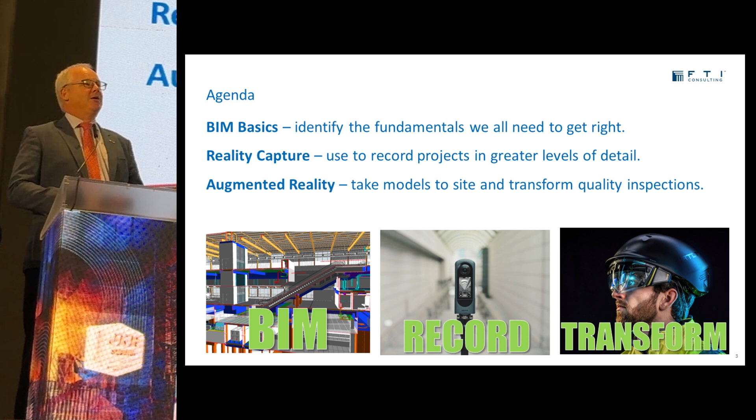And I'm going to leave you with some glimpses into the future of technology in construction. It's not happening on every project, it's only happening on a few, but it's very, very exciting, and it's worth knowing what's coming down the road. Maybe we'll see them on some projects in Kuching, maybe on other projects in Sarawak, but these technologies are coming, and I'm going to give you a glimpse of some of them. So those are the three topics we're going to go through today.

So my presentation today is going to follow a timeline. And as I was introduced, you heard some of those snippets. I'm going to tell you about my journey from when I graduated a long, long time ago in a land far, far away in 96, all the way up to present day. So I started my career working as an engineer, working for a company called Arup, who some of you may know. And I was working on projects in Ireland in the late 90s, doing 3D modelling of steel structures back in 98, 99. So I've been doing 3D for a long time.

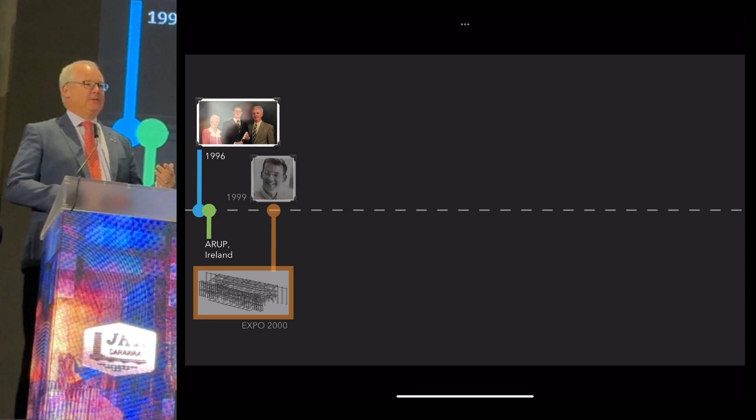In 2000, I moved to Hong Kong. It was my first experience of living in Asia. And in 2003, I started my first company. I really liked Hong Kong, but I wanted to try creating a new company. And that company was focused on using 3D technology to improve construction projects, try and reduce risk, reduce costs, and improve schedule keeping. The mission has not changed in 20 years. I want you to start thinking about how to use 3D modeling to save costs, save time, and reduce risk.

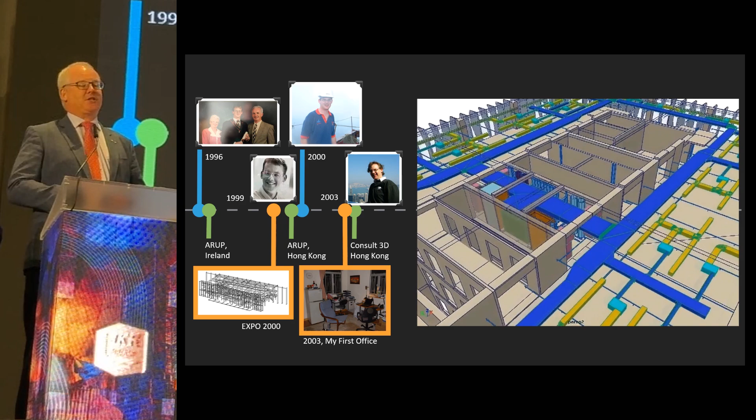This was my first BIM project in Hong Kong. This was an office building, and we were modeling ductwork and pipework. And this was a very simple 3D model. So for those of you who are thinking, well, BIM is new, I have bad news. This technology is 20 years old already, and I've got the grey hair to prove it.

So between 2003 and 2007, as the company was growing, we started working on a number of different projects, but all of our projects were taking 2D drawings from somebody else, making a model, and then finding a problem in those models. And over that period of time, that 4 or 5 years, it was very obvious that it was a valuable process, but it was not effective.

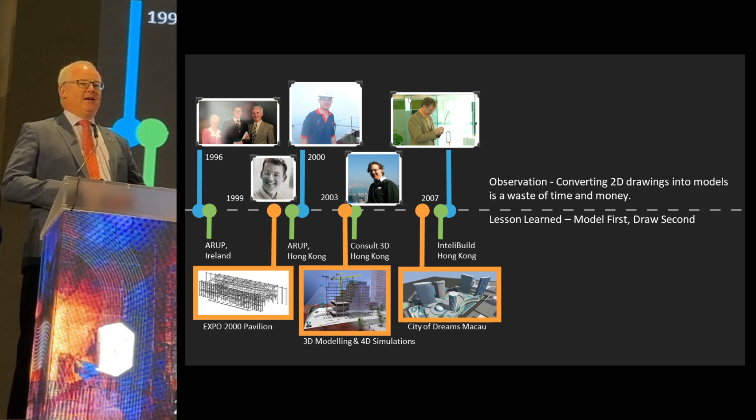Because we would find a problem, and then a month later we would go back to the architect, and they said, oh no, we fixed that problem already. So you would never actually change the design, you never improve the design. So the first real BIM project that I got involved with, actually before I get to the BIM project,

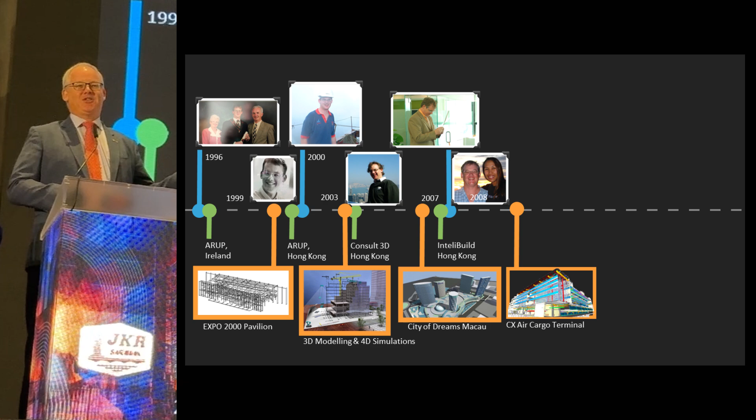the reason I live in Malaysia is I met my wife playing golf in Malaysia. My wife is from Ipoh. She's a squash player and now a pickleball player. But the reason I live in Malaysia is all down to my wife. And she dragged me back here a couple of years ago. So you can thank my wife for bringing me to Malaysia. Yes, a round of applause, of course.

So I'm going to speak about the first real BIM project which we did, back in 2007. This is an industrial facility in Hong Kong. It's the Cathay Pacific Cargo Terminal. This is a very, very large, very, very complicated industrial building. And the owner set out to solve a couple of problems. The owner's masalah was basically he wanted to reduce the risk of problems on the site.

He knew the building was complex. He knew that he could use models to solve some of the coordination issues. There was one very straightforward objective: use the models to produce the construction drawings. That was the objective, because that would then drive everything else.

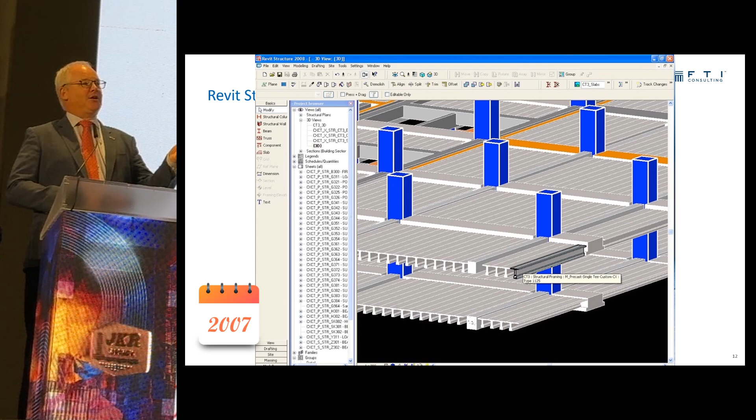So, I'll show you just what this looks like. 2007, this was Revit, a very early version of Revit. Revit is the most common tool for doing BIM. There's a structural model, and the structural model had a number of elements or properties to it, so we could determine the different types of objects, columns, beams, etc. We had an architectural model.

This was an industrial facility, so there wasn't much architecture, so my architectural friends here will be like, well, this is not an architectural project. And then we had all the building systems, the mechanical systems, the electrical systems, and then we had to do the coordination. This was a very complicated project, and it taught us some very valuable lessons.

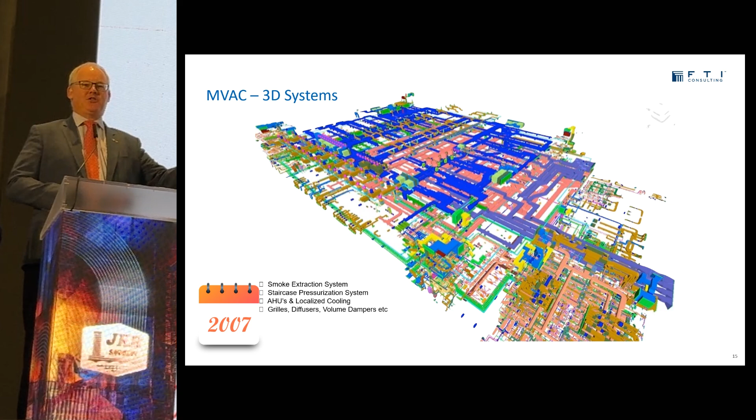The first one is you have to put a lot of information into the model. So building the model is not the actual end game. It's all the information inside of the model. So understanding what fans you have, what pumps you have, what cable trays you have, that's all information in the model. So you need to understand that building up the information is as valuable as building up the 3D modeling.

One of the problems with this project was coordination, and I'm going to come back to that in a second. But this is just one example of the level of piping in the building. And then we used that to produce the drawings. So these are drawings from 2007. And you can see the early stages of an understanding of how to use the technology differently.

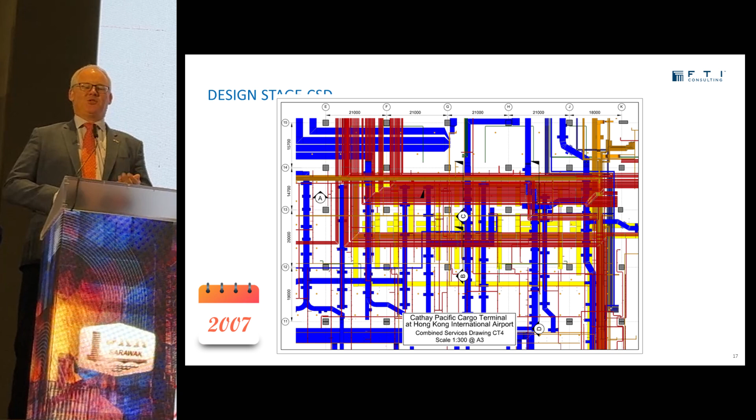If you look at a CAD drawing on a computer screen, it will have lots and lots of color. But then when they print out the drawing, it's all black and white. But it's 2024, we have such a thing as color printers. So why don't we have colored drawings? If we have colored drawings, they become easier to understand because you can see different systems and different layouts. So these were the drawings in 2007. The technology exists. It takes a configuration, it takes a process. But then you can use it to produce good quality documentation.

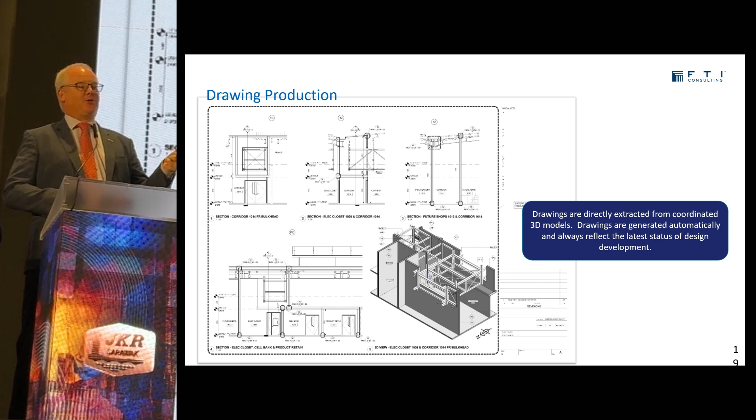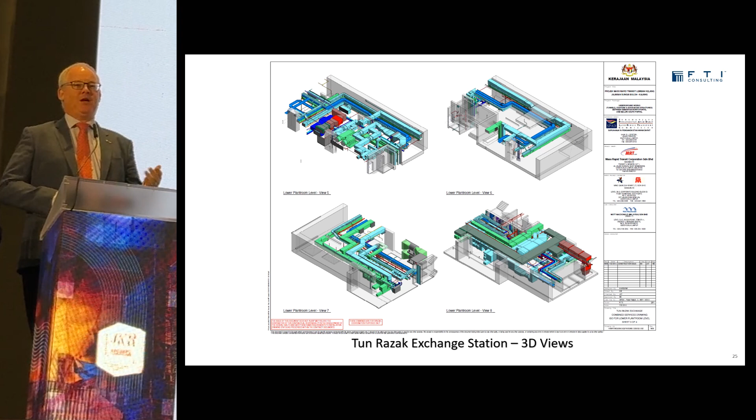But the best part of this is that because you've used a 3D process, you can produce multiple sections and you can produce 3D views. So if you're working in JKR and you're using these tools, if you want to be really successful and you want to get more people involved in the process, don't just produce a standard set of drawings. Add in these 3D views.

And you will start to see two things happening. First of all, people will realize, oh, hang on, somebody has built a 3D model of this project. So if you're the engineer working on the construction project, you will be able to go, hang on, I know there's a 3D model.

I've seen 3D pictures on the drawings. There must be a 3D model. And then what will happen is more people go, hey, how did you make those 3D models? I want to use those 3D models.

So please, please, please, if you're working in the design, whether on the architectural design, the engineering design, and you are using any kind of 3D modeling, it doesn't matter what the 3D modeling is, make some isometric views and put them in the standard drawing sets. Don't just produce 2D drawings and assume that people know you're doing BIM. Make sure you put these 3D views in the drawings.

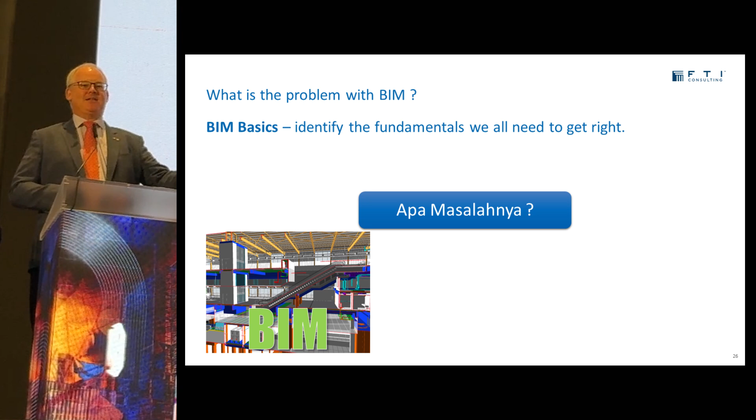That's the contractor's job. So the first problem that you come up with as an owner is when you start demanding BIM, the design team will start going, no, that's the contractor's problem. Okay? So just beware of this problem. And the reason is that when they start doing this coordination process, they call it clash detection. I call this chasing your tail. If the process is not correct, you keep chasing your tail. You go round and round and round in circles. So what does this look like and what causes this problem?

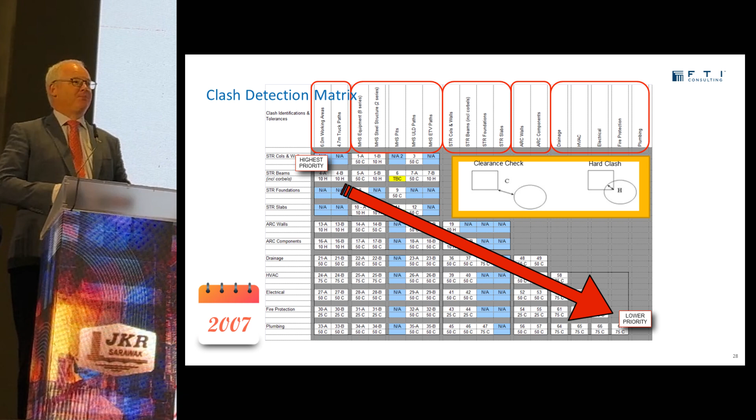On major projects, on complicated projects, our BIM teams will create what we call a clash matrix. We will create basically a set of checks that we want to do in the model. We will check the architecture, we will check the structure, we'll check the mechanical systems and so on and so forth. And we will check one against the other and we end up with this matrix. And every single system is checked against every other system. What that creates is hundreds and hundreds of tests. And each of those tests create hundreds and hundreds of clashes or coordination issues. So you end up with these long lists of problems.

So one example, just to show you one simple snapshot. In this example, the ductwork is clashing with the concrete. Okay? Now this is why the industry does not like BIM, because it is very easy to find all these problems. It is very difficult to sort out which one's most important, which one has to get fixed first, and when do I have to get it fixed by?

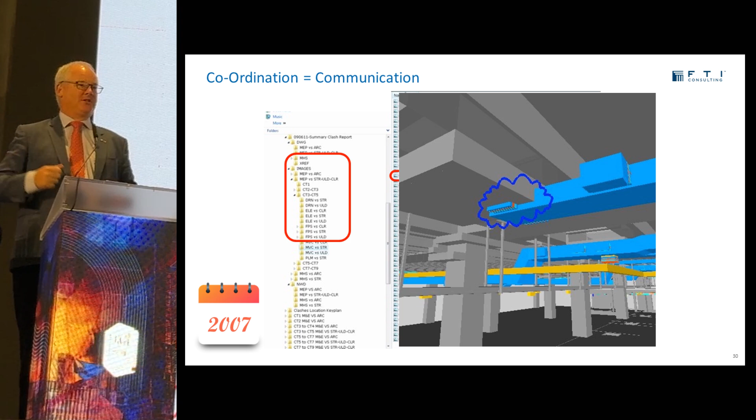So, if you're just new to BIM, it sounds great. But once you've done one project, you realize this process of finding the issues and finding the coordination problems is easy. If you give me a model and you give me 1 hour, I will give you 10 problems back. If you give me a week, I'll give you 1,000 problems. It doesn't mean the design is bad. It doesn't mean that the engineering is poor. It just means that there's more work to be done before we can construct these buildings. So how do we solve this problem? What's the solution?

We recommend that you put in place a coordination process that's set to a timetable. We say every 2 weeks is a guideline. This process is cyclical. It goes around, it's iterative. So every 2 weeks we repeat the process. We put the models together, we identify all the coordination issues, we run a coordination meeting, we prioritize the problems, and we assign those problems to somebody to fix. Design Management 101.

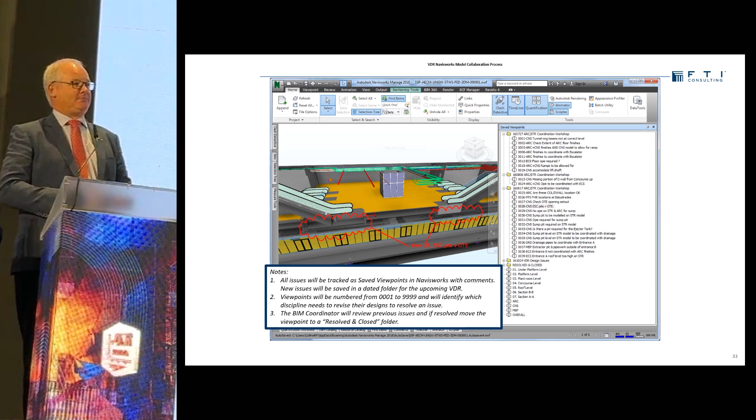But we agree on a timetable to fix the issues. So we find the problem, we find someone who's going to fix it, and we give them a deadline. And then we create a process to manage that. So if you're using Navisworks, you can create a whole set of saved viewpoints in Navisworks. And if you've got things set up correctly, it can be very, very efficient.

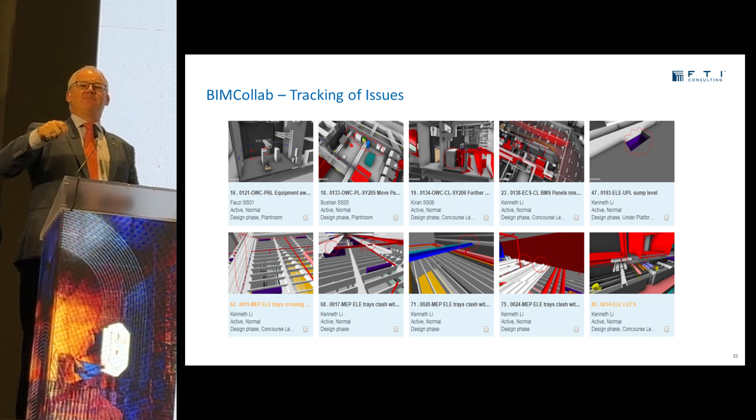If you're using a more cloud-based system, you can use a system like BIMCollab. And the way the system operates, every issue is tagged, every person responsible is tagged, and a deadline is set up. And then you can manage that process. So as JKR, if you're project managing a design, if you're project managing the shop drawing process, if you're managing any kind of deliverable, you need to set up this BIM management process. Identify the issues, identify who's responsible, and then give them a timetable. And then manage that process.

So, how do I play my role in this? With 20 years of experience, I'll be quite honest, I don't like getting involved in projects and doing clash detection and going to meetings. I much prefer to be the advisor and give people advice. So the way I play this is that through my new business at FTI, I come at this in 3 ways.

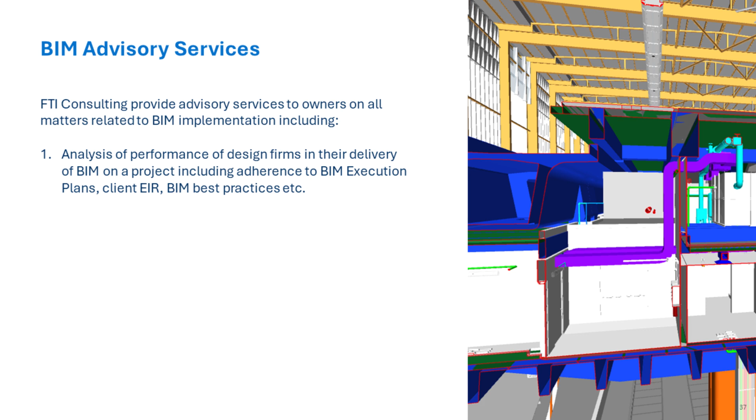So the first thing I do is I will look at how the design teams are performing against the requirements from the client. So if JKR have set out a set of requirements for a bridge project, a hospital project, a school project, I can look at what the design team are doing, and I can tell them, okay, you need to improve this, you need to improve that, you need this training, you need that training, and give the design team the support and training they require to make them successful in the project. They have to be able to meet your requirements, because when we get to the next phase of going for construction procurement, we need to know that we've got good quality models, good quality design, otherwise it's been a waste of time and a waste of money.

And then the third step is actually working with the contractors to make sure that their supply chain, the mechanical contractors, the steel contractors, can also participate in this process. And giving them the training and the briefing and the support to make sure they're successful.

So the way I describe this, I'm a bit like a coach to a basketball team or a coach to a football team. They play the game, they work out the players, I stand on the sidelines and give them a playbook, give them the moves for the attack, give them the moves for the defense. But I coach the teams through this BIM process. And I use my experience of doing it wrong in previous projects to make sure they don't repeat the same mistakes.

So if you're setting up a project and you're new to BIM, these next 6 or 7 slides are probably a good starting point for a client who wants to understand the risks in their project with the designers. So as you set up a new project, what are the problems? Apa masalahnya? What are the problems I have to work out? So we're going to go through it discipline by discipline. This is like a cheat sheet. So the next project you're doing, you have a starting point.

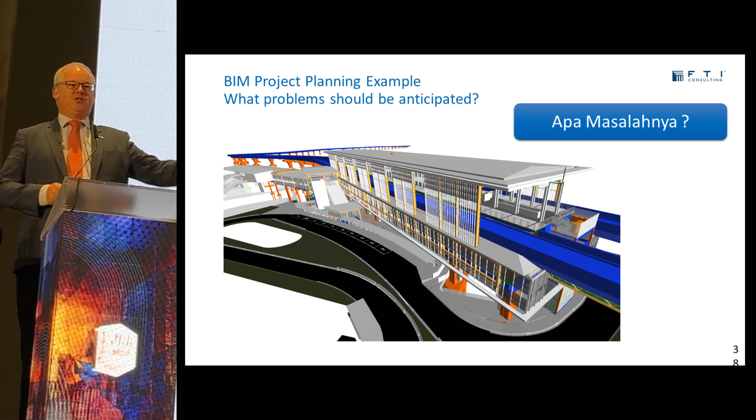So the first one are our friends, the architects. Most architects in Malaysia are now using Revit. They might claim that they're not, and they might claim it's more money and everything else, but most of them have the ability to produce 3D models. This is down to a number of factors. It is down to factors like JKR, Sunway, Gamuda, and other developers like YTL demanding that the architects work in these processes. It's also down to JKR.

JKR have a general policy that all their projects must be done in BIM. So you can assume that the architects are working in BIM. What you need to make sure is they have the capacity and the skills to deliver the project. So usually, the architect is a safe bet. You don't really have to worry about the architect too much.

The structural engineers, I started my career in 1996. We were doing 3D analysis back then. Most of the engineering firms are working in 3D already. They're doing 3D structural analysis, 3D structural detailing. What they're not used to doing is sharing those models with the architect. So what you have to do is you have to make sure that the architect and the structural engineer are sharing the information and they're checking each other's work.

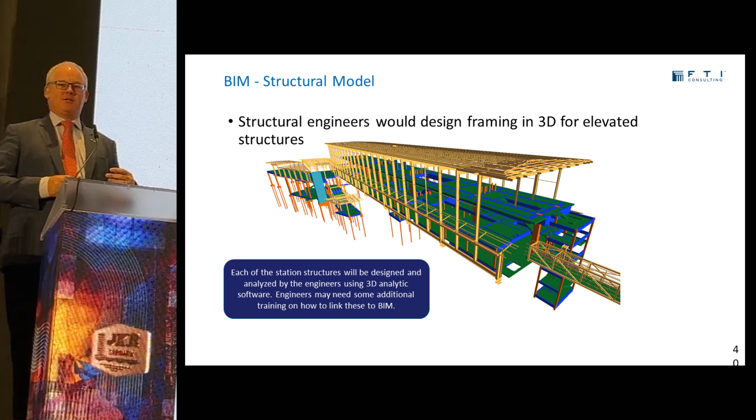So the columns are in the right position, the openings in the right position, the levels are correct. But that interchange should happen automatically. In some cases, the engineers may need a bit of training, but generally speaking, it's something that comes naturally to a structural engineer. And I come from a structural background. Same with the civil engineers.

There's probably less experience in the civil engineering groups. So people that design highways, people that design bridges, those that are doing hydro projects, they have not been exposed in the same way. But if you're doing an infrastructure project, an MRT project, the hydrogen bus project, they can be trained up quite quickly. It comes again naturally. So you need to watch out and see what they are up to.

I met a mechanical engineer earlier, and this is where I have to be very careful what I say next. The mechanical, electrical, and plumbing engineers struggle in the world of BIM, in the design phase. And the reason that they struggle is they're not used to doing fully detailed designs. They're used to doing schematic layouts, they're used to doing kind of level 2 design where they work out all the major routing, but they don't worry about all the interference, all the coordination. Typically, that's left for the contractor. So a lot of the coordination is left up to the contractors to solve.

That is a major problem when it comes to BIM, because we want to actually produce a coordinated design as early as possible. So this is where, as a project manager, you need to spend a bit more time and a bit more effort to make sure that the mechanical engineers, the electrical engineers, and the piping engineers are actually participating. Because if they're not, all the problems that are baked into design will become problems in the construction project. So this is the area that I urge you to pay attention to. Making sure that the engineers on the building services, mechanical design, are actually supported, they have the training they need, and they're given the time to do the work.

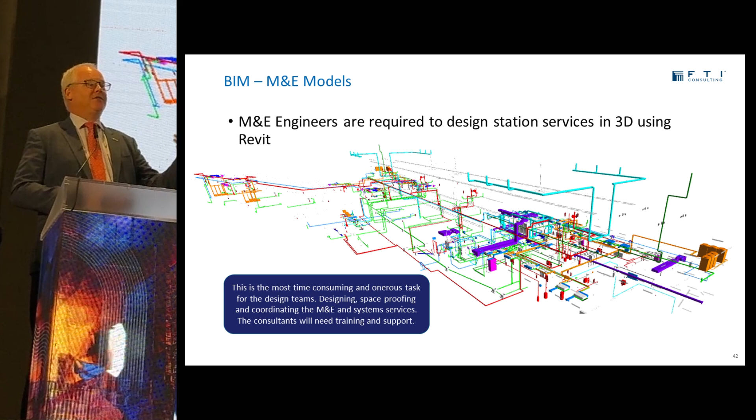And then once you've put all of those teams together, the biggest challenge, like I've already mentioned, is the clash detection and the coordination. Most design firms operate in silos. Mechanical engineers will take the architect's 2D drawing and then draw on top of it. They don't want to worry about openings, they don't want to worry about beams, they don't want to worry about risers. So that coordination is very, very important. So managing the coordination between the structure, the building services and the architecture, that is the biggest challenge in running a BIM project.

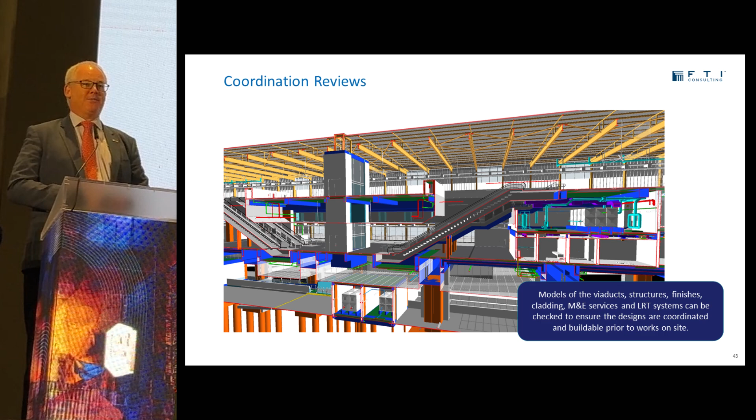So what's the trick? How do I set myself up for success? How many people here have heard of a BIM execution plan, or a BEP? Anybody here heard the term BIM execution plan? Now you have. Oh, we've got our friends from the big project. This is the most important document that JKR must have in your contract documents. If you want to be successful, JKR have to specify and contractually obligate the contractors and designers to work in BIM, and they must specify this set of documents.

The BIM execution plan. Who is going to do the work? What are the roles and responsibilities of the architect, the engineer, the designers, and the BIM staff? How are you going to collaborate? How are you going to do the coordination? What software are you going to use on your project? And that needs to be specified, because the more specification that you make at the beginning of this process, the more likelihood of success. Then you need to define what we're going to use BIM for, which problems are we going to solve, and then you can set out your standards and guidelines. The good news, all these documents exist, and JKR have a full suite of BIM execution plan documents that you can use. What I encourage you to do is put them into the contracts and make them mandatory.

So that's the kind of BIM background. And everything else I'm going to show you this morning is based on that being correct. That you have got structural models, you have got engineering models. So I call that getting it right. I call it the BIM basics, so that you can do coordination, you can do planning, and you can do the sequencing. If you're really good, you can do quantity takeoff, and you can do information management.

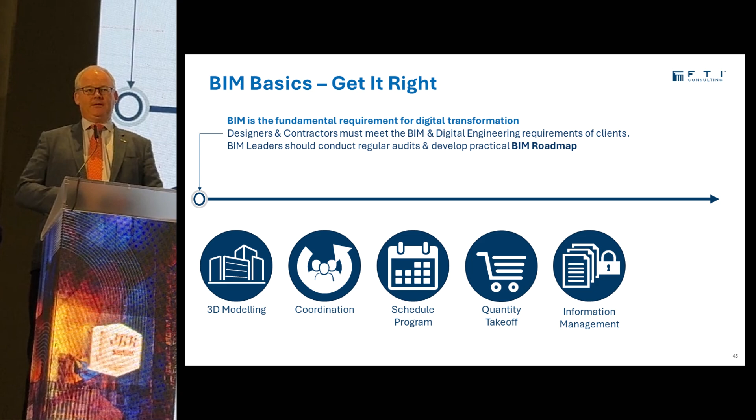So one of the things that's in the middle of the slide, I'm going to quickly show you, is scheduling and programming. How many projects have you seen where someone's done a 4D sequence or a construction simulation sequence? Has anybody seen a construction simulation sequence?

A few people? Okay. So I'm going to share with you an example of a 4D BIM sequence, but more importantly, I'm going to tell you how to use it from a project management perspective. Most of these things are used for marketing and PR, but I want to show you how to use it for actually managing a project.

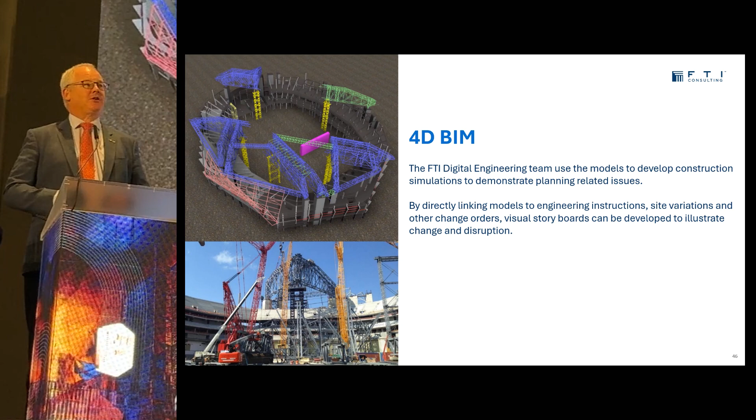So I'm going to share with you an example from a project that we did about 10 years ago. This is a stadium in North America. This is in Atlanta, Georgia. It's called the Mercedes-Benz Stadium. I'm going to show you how we planned the work. I'm going to show you what happened on the project. And I'm going to show you how we use 4D BIM to actually monitor the work.

So 4D BIM is basically linking a computer model to a schedule or a program. So what you're doing is you're taking all the activities that are planned for the works and you're linking those to the actual models. So you can actually simulate the construction of a project. This works for buildings, this works for bridges, this works for underground structures. Any type of project can be sequenced.

There are a number of use cases for this technology. So the first one is actually understanding a project and understanding a construction methodology. So if you're an engineer, can I build a viaduct in this sequence? And will it be viable? And once you've created a sequence, you can use that to communicate with your senior, you can use that to communicate with the contractors, and you can start to get feedback about your understanding of the project.

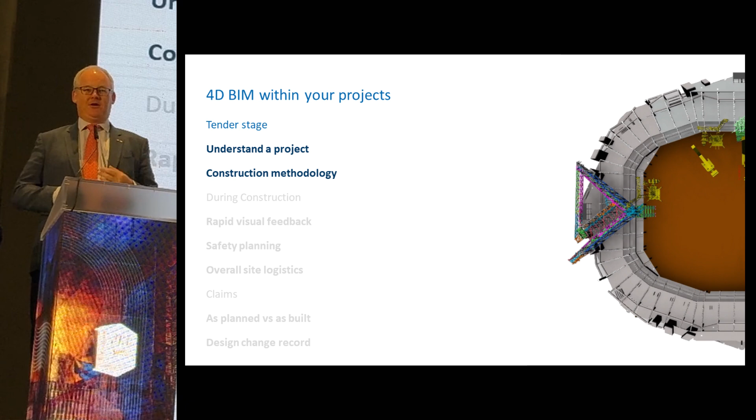When the project starts, you can use this for planning. You can use it for safety planning, logistics planning. More importantly, you can also use it for maintaining a progress record. So if you keep this up to date through the process, you can maintain your progress updates.

And we've all been involved in projects that have ended up in disputes around time, disputes around costs. Sometimes these models can be used to demonstrate what was planned and what happened. That can be used by the owner, it can be used by the contractor, and it can also be used to demonstrate design change. What changed throughout the life of a project?

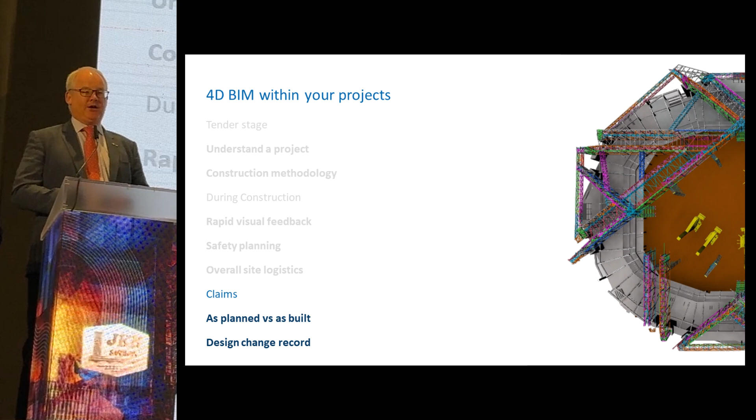So using this example of a stadium in North America, I know it's a very complicated project, but it's a good example. What is the problem? Pretend that you're the contractor and your job is to erect the steelwork for the stadium roof. And this is one of the largest stadiums in the world. How do you plan the delivery of the steelwork, the positioning of the cranes, and the erection of the steelwork to be an effective process?

Traditionally, they would use 2D drawings, they would have cardboard cutouts of the cranes, and they would play with all these cardboard cutouts for hours and hours and days and days. What we did is we created a virtual simulation. So we took the stadium model, and each block that's in the ground is the preparation of the steelwork. So they have to first of all assemble the steelwork on the ground, and then they use the cranes to erect the steelwork. So the blue is the erected steelwork in the sky.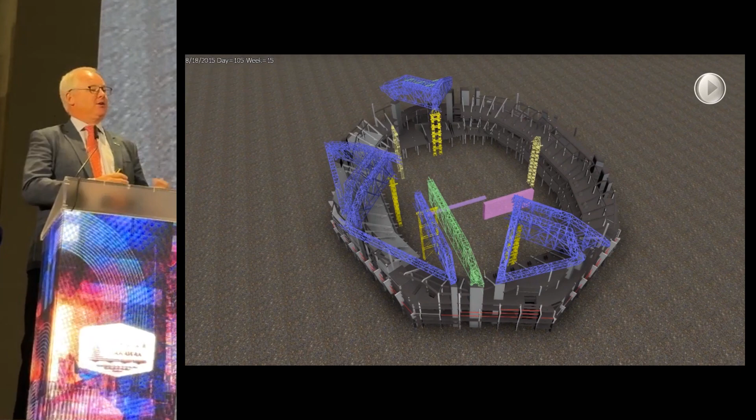So we went through 6 weeks or 8 weeks of this process, working with the planners, working with the crane operators, working with the delivery teams to make sure that we could get every single piece of steel into the stadium, we could erect all the steelwork, and that we would actually be able to do this successfully. So this is planning using a 4D sequence. So we've taken the structural steel model, the BIM model, and we've linked it to the construction schedule. And you can see we've planned out every single step of the works. So you can see how it's all going to go.

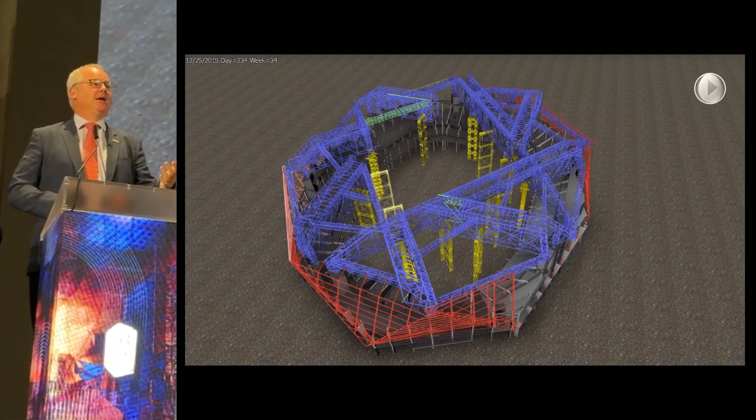The good thing with this presentation is that once you've seen the sequence, you understand how that's going to get built. And then you can share that with the steel fabricator, you can share that with the site workers, you can share that with the safety officer, you can share that with the public if you want. And you can get them to all understand, okay, this is what's going to happen. So that's what it looked like before construction.

The great thing with this project is they set up a CCTV, and EarthCam recorded this project. This is what it looked like in reality. This is a time lapse.

And again, I recommend this for all your projects. If you have the ability to put up a CCTV, it's a great way of recording a project. So you can see all the cranes are inside the stadium. There was no space around the stadium. All the cranes were inside the stadium.

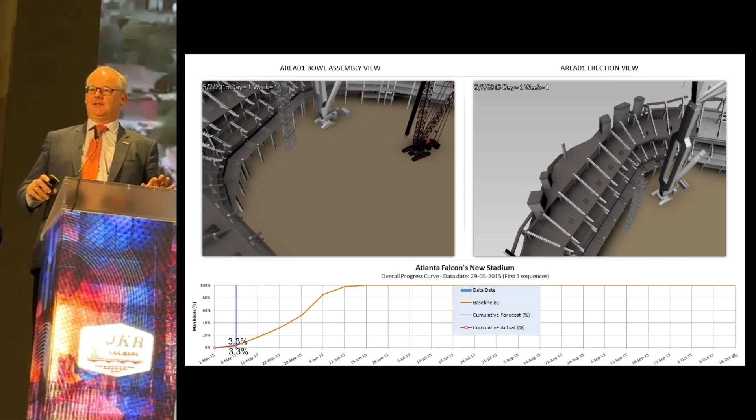And then you will see the steelwork was erected pretty much the same way we planned. So we had a plan, and then we had the actual. And you can do a comparison between the two. And this is where 4D is very, very valuable. So most people will use the 4D to make the animation, and then they'll stop. But then you're losing out a lot of value. If you maintain this process through the construction project, you can actually monitor your progress against the planned.

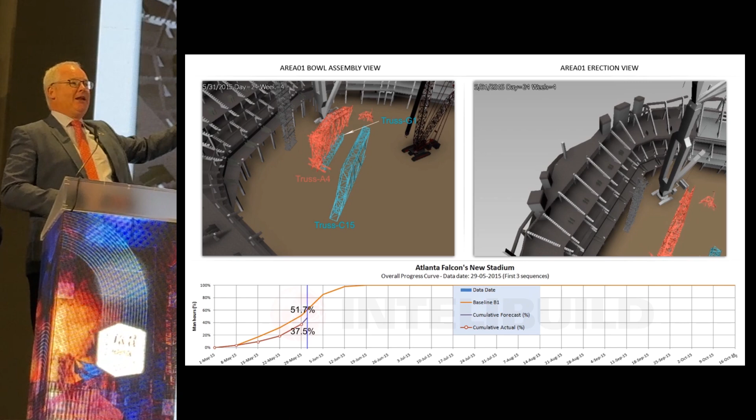So here you can see on the bottom curve, the orange line was what was planned in terms of productivity. And then the red line is the actual data coming from the project every week. So we plotted out using the sequence, and in the top, you can see the actual sequence that was being monitored. So on the top left panel is the erection of the steelwork on the ground, or the preparation, and in the top right panel is the actual erection sequence.

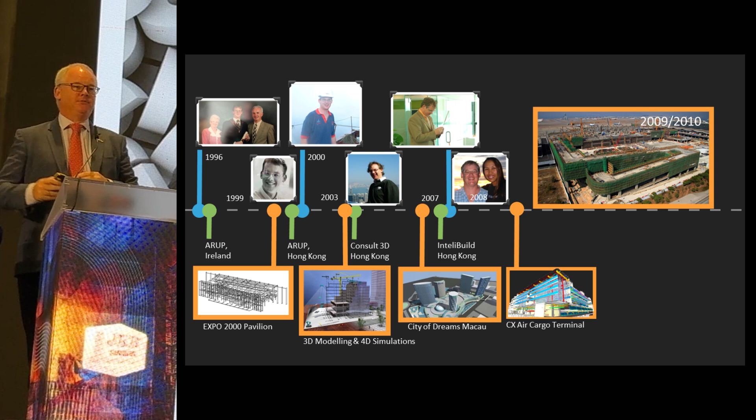So if you're doing this kind of sophisticated project, like a bridge project or a very complicated hospital project, this is a very good way of monitoring how we planned out the works and then what's actually happening on the site. And by doing it this way, you create a very good record of the actual project. So this is a very powerful way of recording a project as it goes forward. So the learning here is, don't just use 4D for marketing, use it for project planning. Now I'm going to transition into and speak about reality capture.

So going back to our Cathay Pacific cargo project as a reference, when we were doing the construction of this project, there was a large number of problems. Let's be honest. BIM was not a big success. BIM was useful, but a lot of things happened that shouldn't have happened. One of the problems was that the mechanical systems, they were highly coordinated in the models, but they were not installed in the same way.

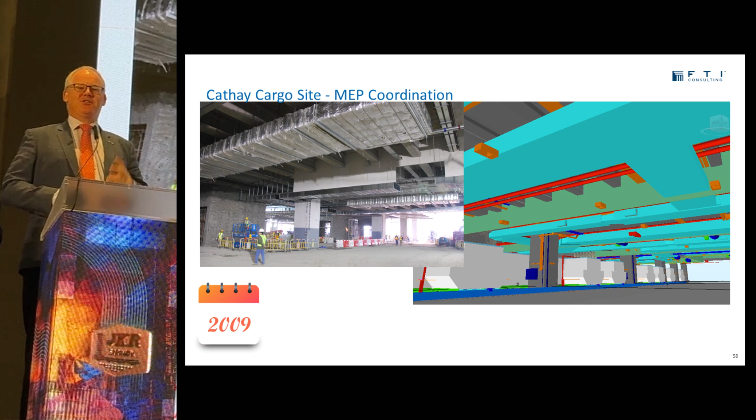So what you will find on projects, again, this is a problem with BIM, the BIM team will create a ductwork layout or a pipework layout, and then the guys on site will go, nah, we're going to do it differently. And then they put the pipe somewhere else. And then you have a problem. Then you have a site that's different from your engineering coordination model. And then you're in real trouble.

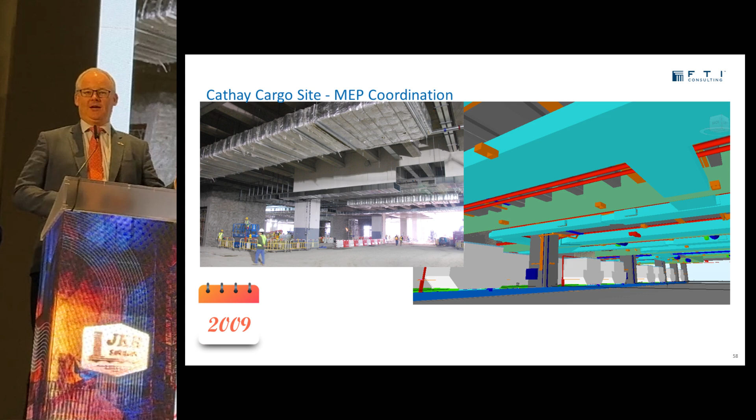So in order for us to monitor what was happening on the site, we would walk around the project with a digital camera, take a photograph, and then we would go back to the office. We would try and find a similar location in the models, and we would do a visual comparison. So in 2009, 2010, the best technology we had was to take basically holiday photographs and compare them to the models. And if something was different, we would send an email to the construction manager going, at this grid line, this cable tray is in the wrong location on site. And then we had to make a decision. Do we have to take it down and fix it, or can we work around it?

Okay, but we had no way to link what was happening on the site to what was happening in the model. So the challenge in 2009 was, there was a model that was on a computer, and then there was what was happening in the real world. And there was no way to bridge that gap. They lived in two very different worlds. So the problem is, how do I compare what's happening on the project to what's in BIM? And it was very, very difficult 10, 15 years ago.

The good news is, now it's really easy. And it's also really affordable. So I want you to see what's happened in 10 years, and I guarantee you, at least 2 people are going to get on Lazada and order a 360 camera before this presentation is finished. Because this is really useful technology.

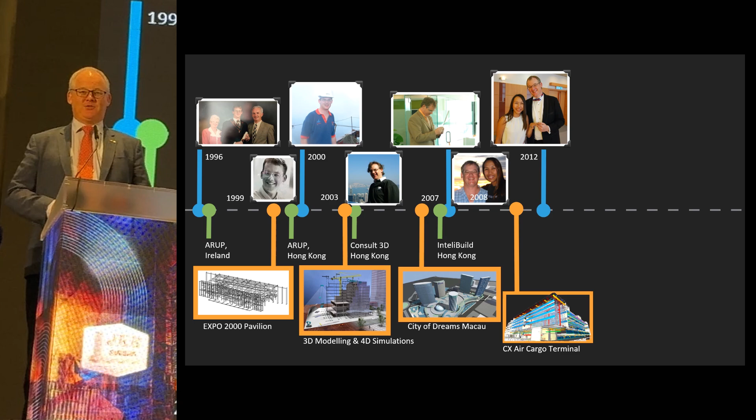So, before I tell you about that, my wife got me married in 2012. That was it, I was done.

In 2014, we moved on to the Midfield Concourse Terminal. And this is where we learned about a better way of linking BIM to the site. So I'm going to speak about 3 technologies this morning. The first is going to be laser scanning. The second will be 360 cameras, and these are the sequence, and then I'm going to talk about drones.

Laser scanning was the first technology available that could link the real world back to the BIM world. By scanning a construction project with laser scans, I can overlay that with a BIM and I can start doing a direct comparison. It was no longer a spot the difference visual check, it was a real 3D check.

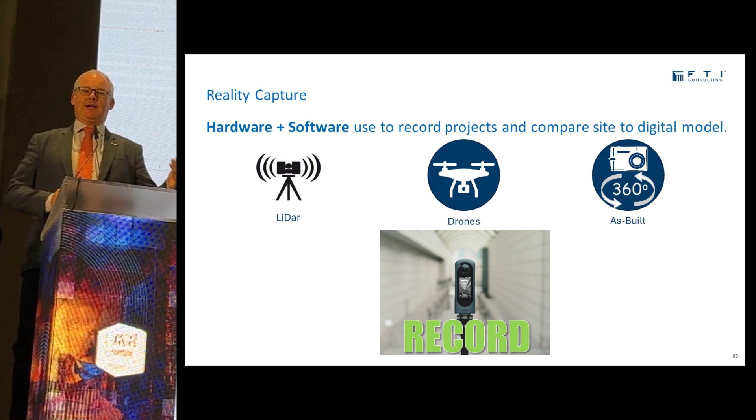360 cameras have become very popular in the last 3 to 4 years, mainly because the technology's got much, much better, but they're also much, much cheaper. So you will start to see many, many projects using 360 cameras. I can tell you now, all the major contractors in Malaysia are already doing this process. So Sunway Construction, Gamuda Engineering, YTL Construction, all have 360 cameras, and they're all using them on their project.

So how do we get to laser scanning? So this is the roof of an air terminal in Hong Kong. It's a very complicated geometry. It's a skewed or off-grid geometry. The first thing you notice is that's the design model, that's the fabrication model. So you can see that as you go through the process, the level of detail increases dramatically. So the contractors' teams, the fabricators, add a lot more detail.

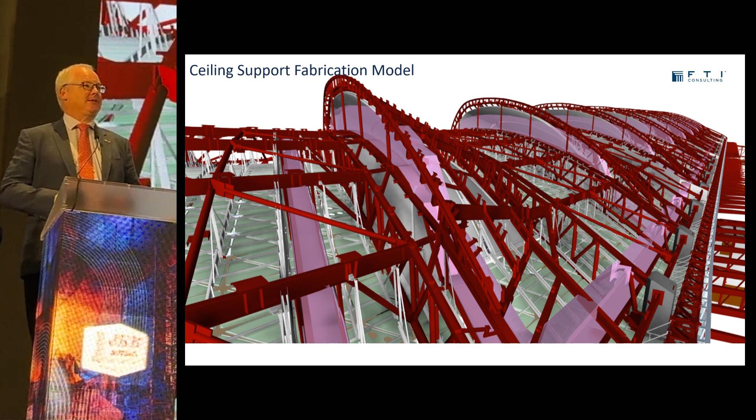On the underside of the roof is the ceiling system, and on the upper side of the roof is the rain screen and noise screen. So these are very complicated roof systems because of an airport environment, but essentially it's an aluminium cladding system sitting on top of a structural steel system. On the inside of the building, it's a clear span structure because it's an airport. All the mechanical system is inside the steelwork area. The ceiling system is hung from underneath.

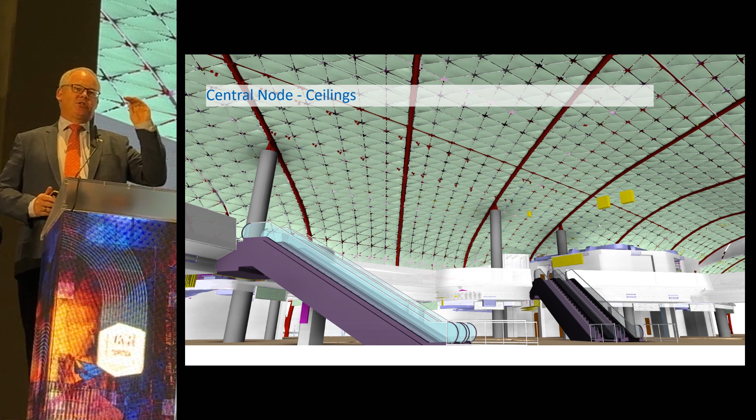But what you'll notice from this image of the model is that the red lines are the primary structural steel, which are actually visible inside the airport. So when we were fabricating the steelwork, we had to make sure that these chords were 100% correct, or as close to 100% correct as possible. So when we installed the steelwork, the red lines became white because it was painted, because it was exposed. How do I check that that steelwork's in the right place?

Traditionally, I would have to set up a whole bunch of scaffolding, then I would have to set up a survey team. They would have to mark out a grid on the steelwork at maybe 1 meter centers, and they would have to measure the datum along those centers, and then check that against the engineering calculations. This building was too complicated and too sophisticated, too busy to fill the whole thing out with scaffolding. So we tried to survey it with laser scanning.

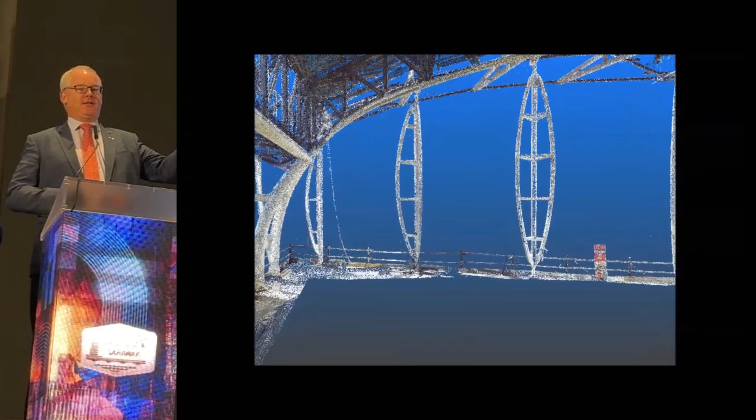So a laser scanner is like a total station. So basically, it surveys the steelwork using infrared light. And what it does is it creates a point cloud. So this is a 3D scan of the steelwork. This is the end wall of the building. And you can see the steelwork, you can see scaffolding systems, you can see the temporary work systems. You can capture all the details on the site. This has to be done by a surveyor, and it requires a very expensive piece of equipment.

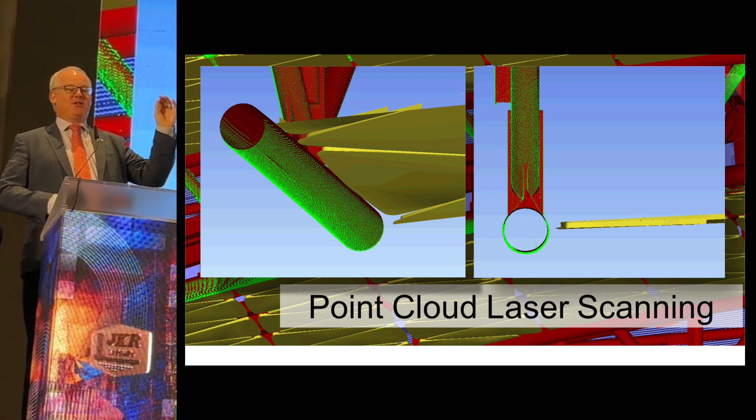Once you have that point cloud, you can then bring that back to BIM and you can actually compare the two. And this is where the technology is immensely valuable. You can use the point cloud to validate the design. So the green is a scan from the site, the red is the engineering fabrication model, and you can see, now I picked the best example so we know that the steelwork was good, but you can see that the steelwork lines up with the engineering model. So we know that what's installed on the site matches what's on the fabrication models. We're good, we're happy.

But what happens if we want to do something a bit more simple? What happens if we just want to survey steel brackets? So this is the prefabricated steel structure. So this was fabricated in China, delivered to Hong Kong. And we started to find problems with the quality of the work. And there were too many problems. So rather than surveying every single bracket, we scanned all these structures. So this is a point cloud scan of an entire link bridge. And it looks like the real world, right? So this looks like a reality mesh, a reality model, and you can see all the detail of the steelwork.

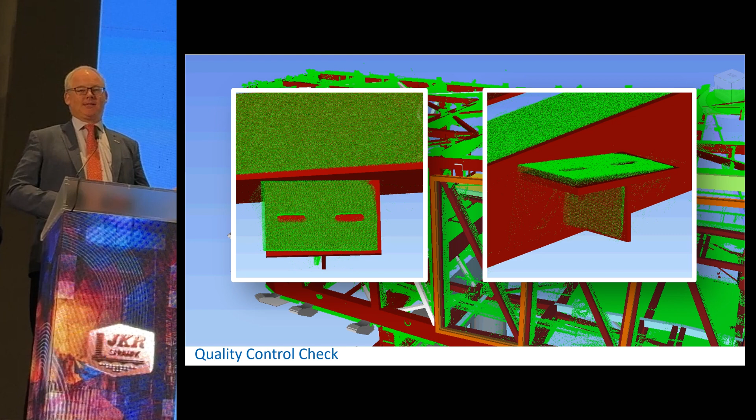The laser scanner is so precise and so accurate that we can take this point cloud data, again, check it against the steelwork, and we can start to quickly identify where holes are missing in plates, where plates are out of tolerance, for example, within the thickness of the plate, and we can pinpoint those problems.

And then we can instruct the fabricator, you need to go back to here, here, here, and here and fix it. This is a much faster way of surveying sites and steelwork. It's a much better way of doing interface checks, and it's highly accurate, 1 millimeter accuracy. The only problem is the hardware is expensive, and it needs to be done by qualified surveyors. This was 10 years ago.

If you're not doing laser scanning now, I can guarantee you will be very soon. And what I want to show you next is where AI is going to take this technology.

So when you combine artificial intelligence algorithms, point cloud data from a construction project, and a BIM model that's on the cloud, you end up with this. A technology called Naska. Naska is a European technology, and what they do is they highly automate finding the problems. So I'm going to play a video which explains the process, just to share with you where this technology is going to go.

We are capturing data on construction sites using devices like the BLK2GO, which is really as easy as just walking around with this device in your hand. You don't need costly surveyors to be able to capture all that information. Walk around, capture that high quality data, upload all of that to the cloud, and then what you have is raw data that our computer vision and machine learning algorithms then go to work on.

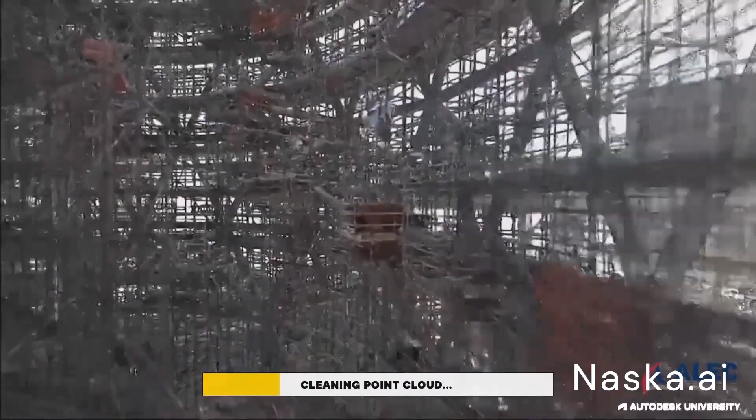We do recognize that we do not operate in a vacuum. We're not solving all your problems. We are just one portion of this ecosystem, and we're a platform that opens itself up to all of those inputs. So model data should live in ACC.

Laser scan data, hey, that should come from Leica, that should come from Cyclone. We just take all the information that is already available, we process it, and then we deliver it back to you as an additional level of information. We're leveraging the investment that you have already made in these platforms to gather all this information. So we take that and we turn it into actionable information that you can then use to make better decisions on. So we take every element in the BIM and we automatically classify it.

So gray means no data, not enough information to make an assessment. Green is verified. That means it's within tolerance. That's obviously good. Red is missing, so that means that it hasn't been installed. That's not necessarily a problem. That really depends on context. And then orange is out of tolerance and has not been built correctly.

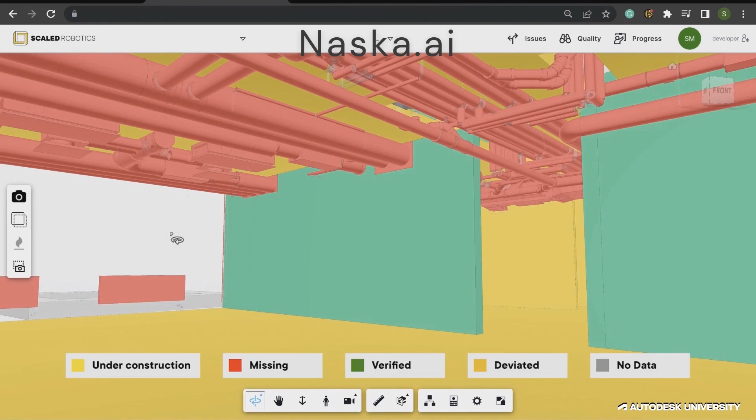And then that lighter yellow color is under construction, which means that it's halfway between being built and not being built. This means that we can immediately flag up risks on your project. Here, there's a penetration, there's a block out, it's missing. I can immediately see that it is in fact actually missing. Here, lift shaft is telling me it's deviated, it's been flagged up.

I can visualize that deviation in 2 seconds, and I can see that the lift shaft doors are the wrong size, they're missing material on the top. That's obviously a problem. Get out ahead of that. Here, this steel column, it's missing. That's obviously not great as we're moving the project forward. And in literally seconds, I can flag all those risks up to the guys on site who are then able to make better decisions with that information.

The reason I show you that video is to give you 2 messages. First of all, the technology is out there. So if you want to use AI for doing quality control, quality checking, it exists. But, and this is a huge but, if you do not have a good quality model that's detailed for construction fabrication, this technology is a complete waste of money, and it's not cheap.

So you must have a very good quality of BIM and a very good level of detail to make valuable use of these technologies. And what we're seeing in industry is the contractors that started their journey in BIM, when I started my journey 15, 20 years ago, they get the value because they've been doing this for many, many years. My objective here is, your roadmap at JKR should include, in a 5 to 10 year window, using these more advanced solutions. But you need to create a roadmap to get there in order to actually unlock these tools.

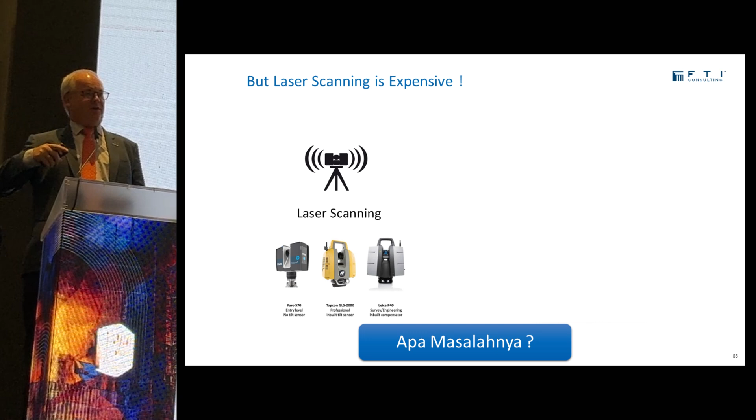So, rather than using the expensive laser scanning, there's an easier way to start this process, and it's called 360 cameras. A 360 camera is the same size as a mobile device, and it's got a lens on both sides. It's quite straightforward. This technology records a video. We recommend you do this every week, so you walk around a construction project every week.

And for those of you who have seen this, the recommendation is that you walk around at the pace that you would bring your auntie if you were going for MACC. So you don't go running around the place, you walk around as if you're bringing auntie for MACC, and that's the speed that you walk at.

So as you watch the engineer walking around, the 360 camera is on their helmet, and they have a mobile device. The mobile device is tracking their location, so the mobile device knows where they are, and the 360 camera is recording everything around them. So this is creating a video of the construction project in 360 degrees. If they stop, it will create a very high resolution photograph at that location.

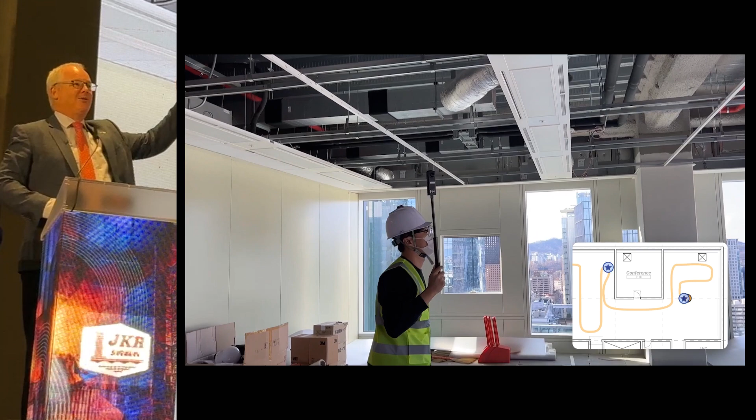And in addition to being able to walk around with it on your helmet, you can also walk around with it on the stick. The advantage of the stick is you can put it up in confined spaces. You can put it up in ceiling spaces, etc. I've done this and put it 10 meters up into MEP spaces. So this works at very, very long distances.

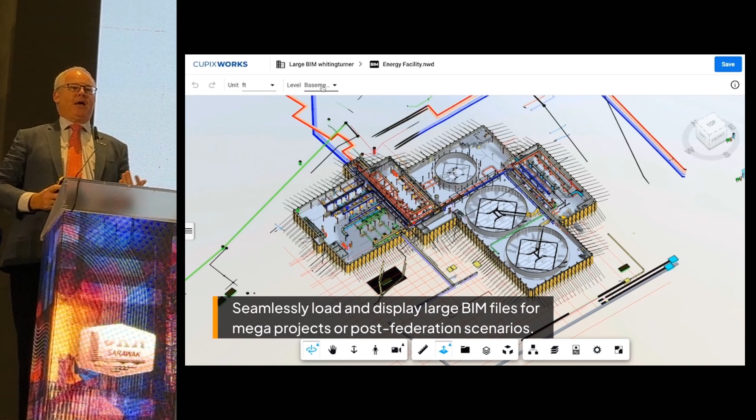When you're finished your survey, the software will then take your video, it will bring it to the cloud, and it will create a 3D model of your project based on your 360 photographs. And then you can compare your site to the model instantaneously. So in this example, there's actually a 360 video on a drone. This is an industrial facility.

As you change either the model or the photograph, you can see what's happening in the other one. So as you're walking through this plant room, you can see the 360 imagery. You can also see the 3D model on the other side. So again, if you have a good 3D model, this is a very powerful way of managing a project.

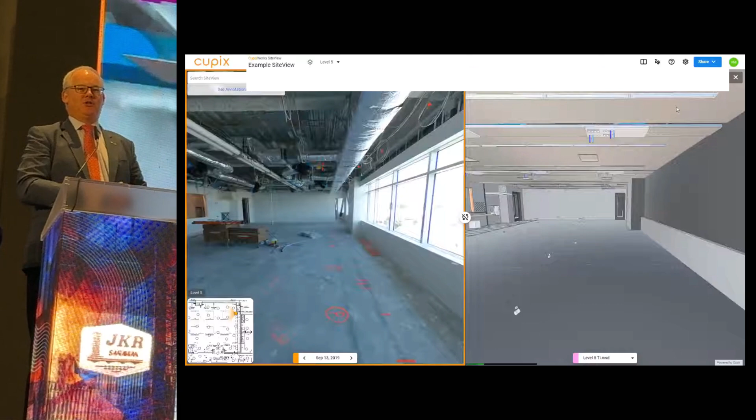Where this is immensely useful is you can take objects from the model and you can copy them into the real world. So you can start to look at what happens if I install a pump, what happens if I install a new ceiling, what happens if I put a new staircase in this location, and you can visualize what the design will look like in the real world.

The great thing with these 360 cameras, they're cheap, they're about $200 each, and the software is relatively cheap to run. So you don't need to have a surveyor, you don't need to have engineers, you need to have basically a mobile phone and a camera, and off you go. And you can use simple massing models, or you can use very complicated engineering models. So again, this is a very easy way to get a first tool to compare what's going on in the real world and what's happening in the virtual world.

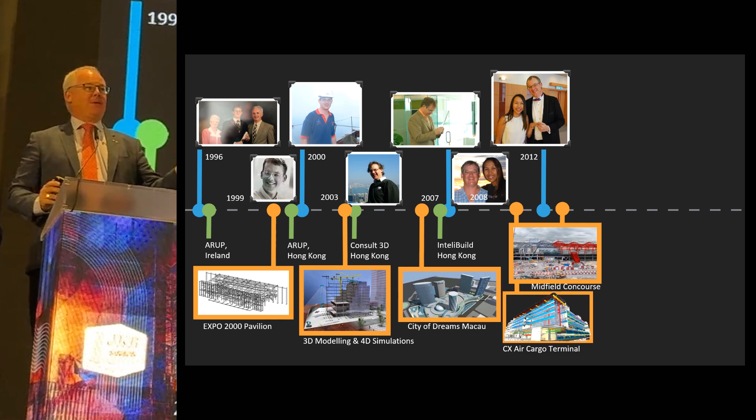So going back to my timeline, my world changed in 2014. My son was born. He's now 10, so he now tells me what to do, so the chances of me telling him what to do are gone. He now bosses me around.

We moved from Hong Kong to Malaysia in 2016, and I joined Gamuda. And I was very fortunate when I worked with Gamuda. I got to work on some amazing projects, including MRT2, including the high-speed rail. We also worked on the Penang LRT, and I did some work on projects in Australia. So working with Gamuda was an absolute pleasure.

One of the things that we did in Gamuda was use drones for surveying. Now, most people have seen drones take photographs, take videos. But did you know you can do surveying with drones? And this is the only time you should use drones in a construction project, if you ask me. Drones are a very powerful way of collecting data, and they're a very powerful way of doing surveys. So how does a survey work with a drone?

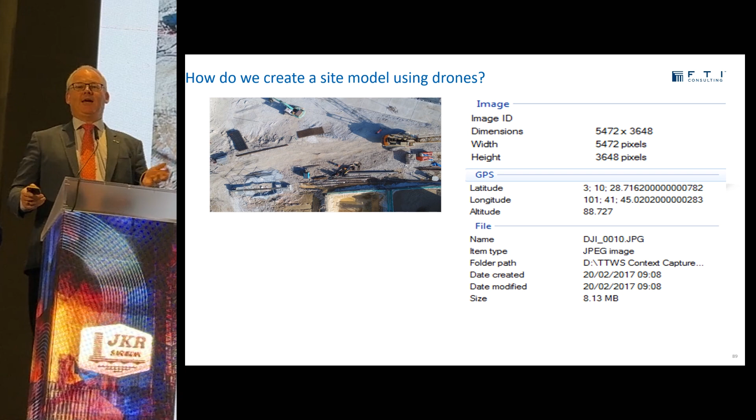You take hundreds of overlapping photographs, 70% overlap, and then the computer converts these photographs into a 3D model that's accurate to about 20 millimeters. So depending on the elevation of the drone, depending on the detail of the photographs, you can create a 3D model of a project in about an hour. Okay? You can create a 3D model of a project in about an hour.

It would take a survey team a month to do what I can do with a drone in an hour. So to give you a sense of resolution, that's myself and my friend Nick Moorcock standing by the excavator in that sample photograph. These were taken 9 years ago. And this is what it looks like in reality.

You have an application, again, on a device. The drone is flying on its own. Nobody has to play with the joysticks. You tell the drone where to start, you tell it how many photographs you want, and it goes off and it flies over the site.

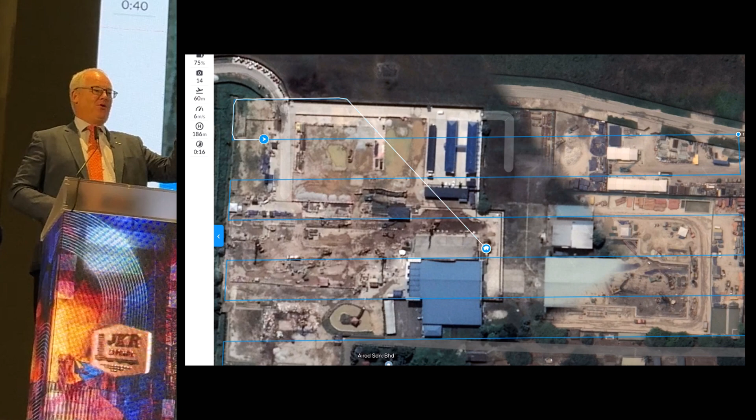A couple of golden rules. Always keep the drone in the site. Do not let the drone go outside the project. Because if it hits something like a telephone pole or a crane or another building, it's not going to end well. Okay, so keep the damn thing in the project. That's number one golden rule.

This is one drone videoing another drone doing a survey, right? So this is just for fun, but this is what it looks like. The drone is just automatically flying around. If you get close to construction equipment, you have to be very, very careful. When we started doing this, we did have a couple of experiments, and in one experiment we hit a crane, and that was the end of the drone. So not recommended, they're not cheap.

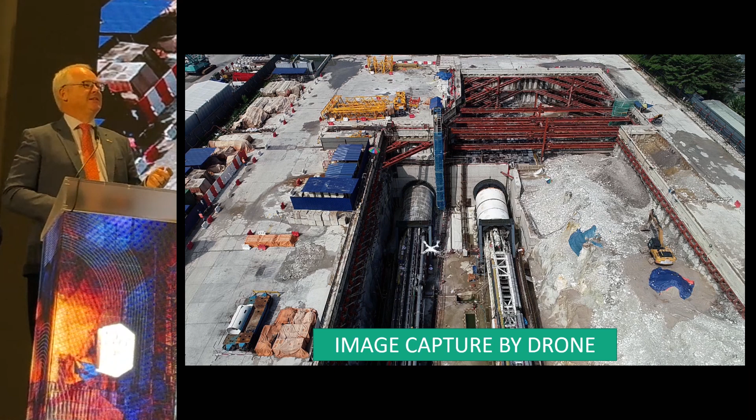But you can use these for any type of civil engineering project. In order to make it successful, you need to have what we call ground control points. Again, the survey team need to be doing the drone survey. You need to train your surveyors to use drones. You do not need to buy a drone survey company. You just need to train the surveyors how to use the tool. This is basically a flying camera, and the surveyors love it. In Gamuda, we trained 25 surveyors to use these tools.

So, get your ground control points, and then make sure you create a safety playbook. These are dangerous things. The battery alone weighs about a kilogram. If that thing falls out of the sky and hits somebody, it's going to be a serious injury. So we always operate with two people. We have a pilot who operates the drone, and we have a safety officer, we call them a spotter.

And the spotter is basically watching everything else that's going around the project. And he has got a radio connection directly to the safety manager. So if anything happens, they bring the drone back and they land the drone. Okay? That could be a helicopter flying nearby. That could be a crane doing installation. It doesn't matter. Safety, safety, safety. Must be done. So I'm going to show you a couple of examples of what you use this thing for.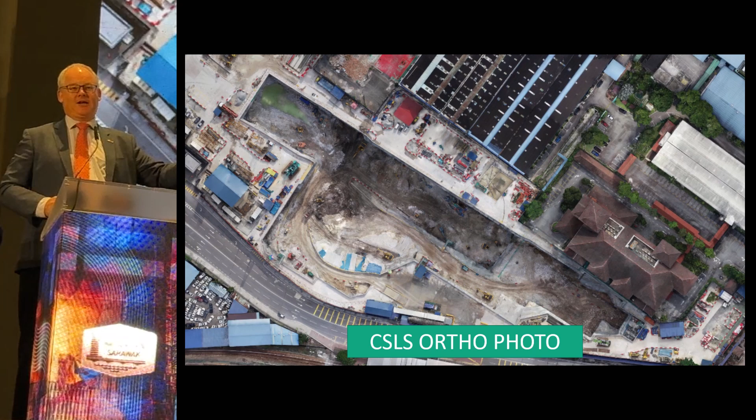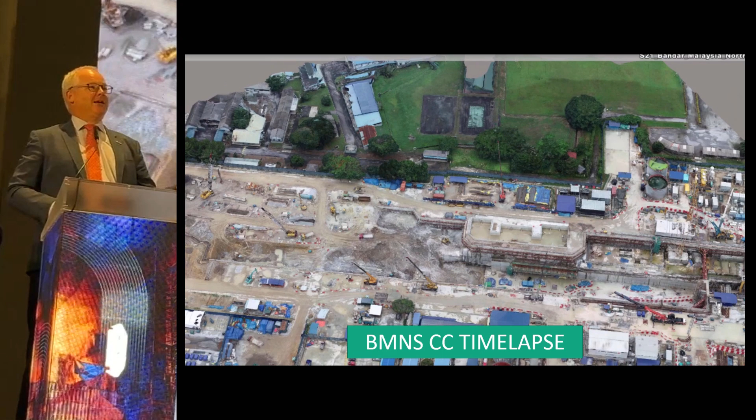My favorite use is to use them for time-lapse. These are 3D models of the excavation for a station box for Bandar Malaysia, and you can see the advancement of the works over a month-by-month period. Because these are 3D models, I can measure volumes, I can measure depths, I can measure areas, and I can compare 1 month to the next month. Okay? Again, it took me 1 hour to fly the site on one occasion, and now I've got all this valuable data I can use over and over and over again.

When you compare this, you can then use the model, and you can actually link it back to BIM. So again, if you've got a very good BIM process, you can use the drones to compare what's happening on the site to what's happening in the real world. So this is the excavation, this is the TBM arrival. This is what it looks like on the computer. So this is the mesh that's created from the photographs. This is a three-dimensional model created from photographs flown from a drone 100 meters off the ground. Okay? I can then overlay that with the BIM, so I can see what the diaphragm walls are, I can see what the slabs are, and I can get a sense of, okay, it's under control.

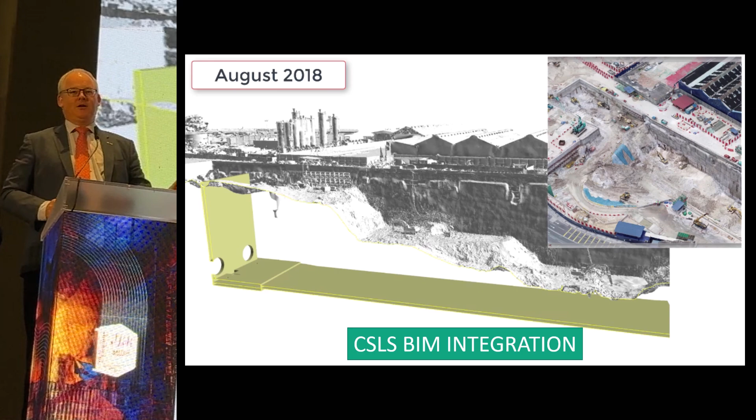Where this is useful is when you start to do monitoring every month. So you can start to monitor your progress. The yellow is the excavation limit, that's the base slab of the station, and you can see the progression of the project month by month by month. And I can use this to calculate volumes. How much material have I removed? How much material is left to be removed? Okay, so this is where drones are very, very valuable as a survey tool, particularly for civil engineering projects.

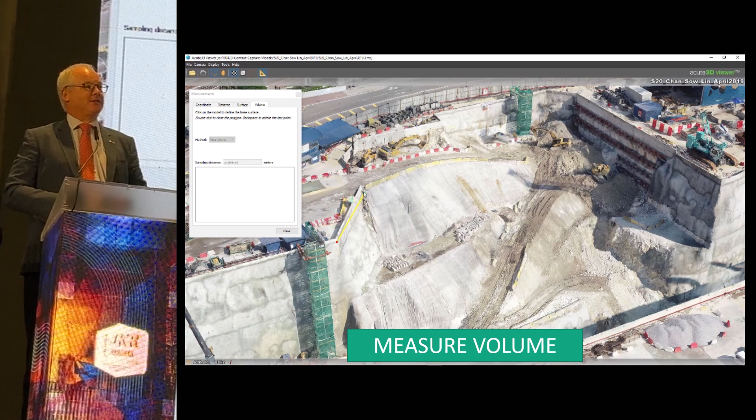And this is just a quick example of what this looks like in terms of quantity takeoff. So this is basically clicking on the boundaries, and in this example, I want to work out how much material do I need to remove to create a platform at a certain elevation. So I basically identify the boundary of the platform. So I don't have to pick the point, I just have to pick the outline boundary,

and then I tell the software, please create an excavation, and I set my datum, I think it's at 30-something meters, 28.5 meters, and then it will give me the volume of how much material I need to remove to create that platform. Okay, so the software can actually do the calculation. So that's the use of drones.

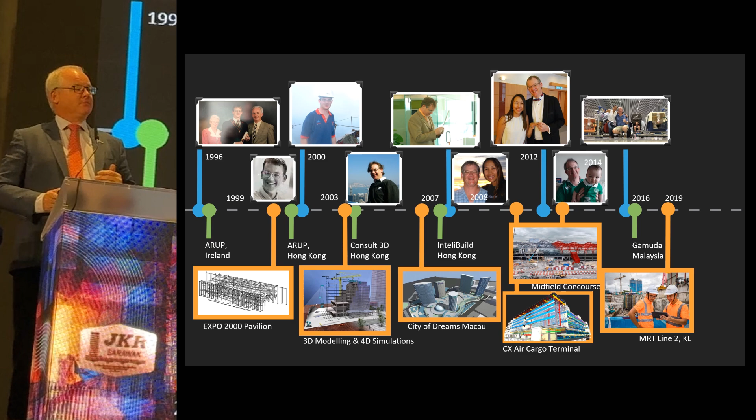As we come to the end of the presentation, I'm just going to share with you one other technology, and then we're going to get to the questions.

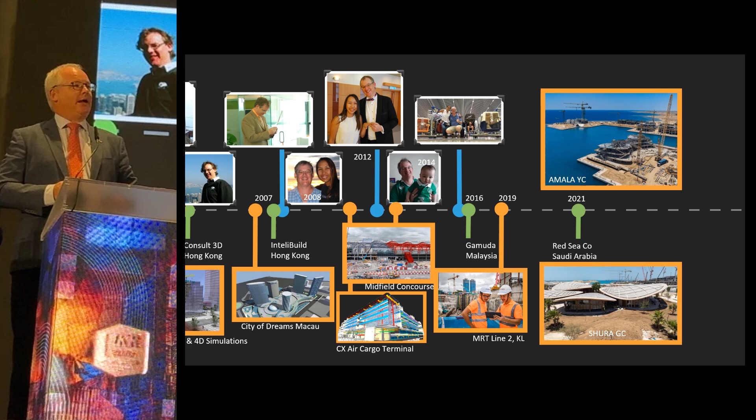So in 2021, at the end of COVID, I went across to the Middle East, and I went to work on a project in Saudi Arabia. I was very fortunate to work on two projects. One was Amala, and one was the Red Sea. These are incredible resorts that they're building, but Saudi Arabia was not for me, so I came back to Malaysia.

And when I came back to Malaysia, I joined HSS Engineers in KL, and we were working on MRT3. And as part of our work for MRT3, we started to put in place research as to how we were going to improve the actual work on the projects from a quality perspective. So I'm going to leave you with this last example of where I think this technology is going to go in the next couple of years.

And this is transformative. So the way this works, the model is in an iPad device. It can be a tablet, Samsung tablet, doesn't matter. And you can see what you're going to build in the future. So you can see what steelwork you have to install. You can see what bridge piers you need to erect. You can see what scaffolding is required. You can start to project what has to be built, which is a massively important part of construction.

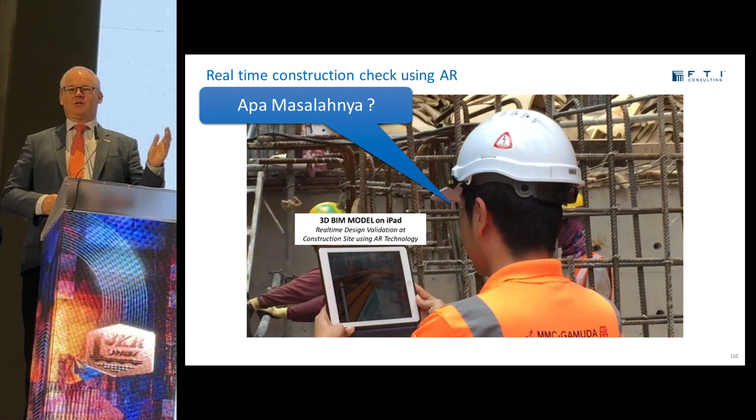We started this process on the MRT2, and the problem was, how do I stop coring concrete? The problem that we have on most projects is that we build concrete structures knowing that in a year's time we're going to have to put a hole in the wall for a pipe, or we're going to have to diamond cut the wall to put a ductwork in it. But if we know where the ductwork's going to go, why don't we build it right the first time?

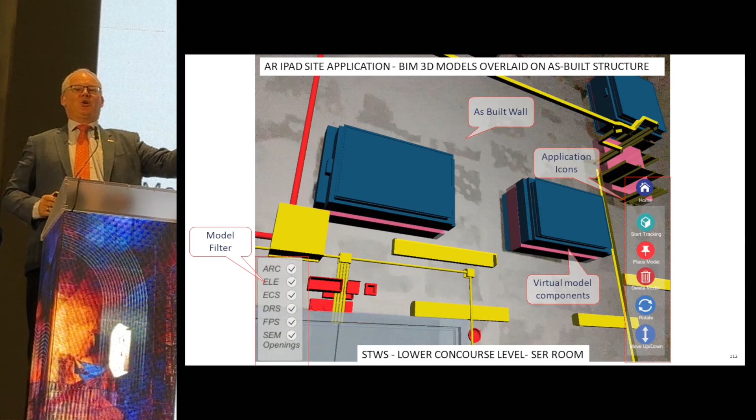So what we're doing here is we're actually bringing the models to the project so we can see where an opening is required. We can see where a pipe penetration is required. We can see where a sleeve is required. And we can make sure when we're checking the reinforcement that everything's in the right place. By using augmented reality, I can see what's going to be built in the future, so I can make sure what I'm building now is not going to cause a problem in the future.

So this is what it looks like on the software screen. It's basically the 3D model in the real world. So how does it work? You have a reference point.

So you start off with a reference point on your device. You then position that in your camera. So you identify where you are in the real world. And then you have now got the 3D model linked to the real world. So as you move your device around, you can see the model. There are a number of use cases for this.

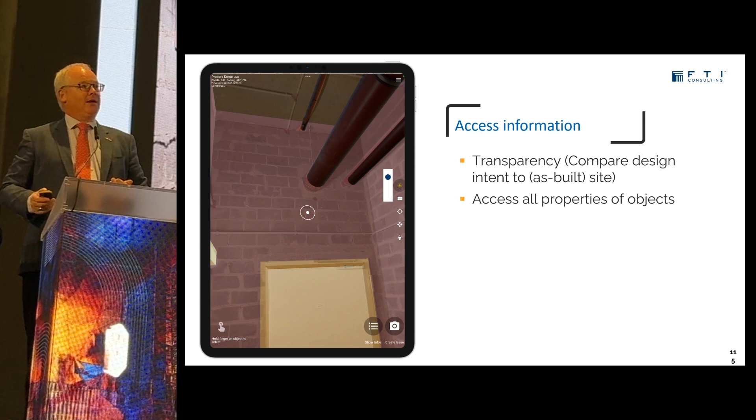The first use case is quality control. So as you're doing an inspection on the job, if you're the inspecting engineer, you can make sure that everything that's in the model is installed correctly. So you can make sure the cable trays are right, you can make sure the pipes are right.

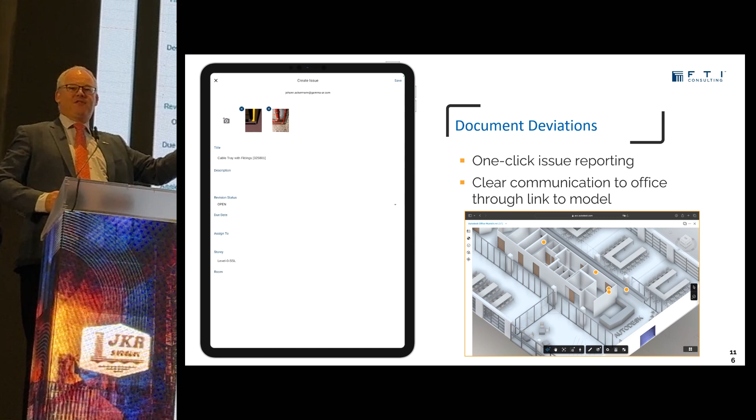If you see a problem, you can then document that problem. So you can take a snapshot of the model, and it will take a photograph of the real world, and then it will record that on your system. And that system can be Autodesk Construction Cloud, it can be Procore, it can be Bentley, it doesn't matter. But then you can assign that problem to someone to fix.

So like the clash analysis, you find the problem, you identify that someone needs to fix it, and then you email them and say, hey, in this room, in this location, there's a problem. And then they go and fix it. So from a quality management perspective, this is very beneficial.

So these tools are designed to work on the cloud. The good news is, even though we had SDEC talking about connectivity earlier, you don't need to have data on site. So you can do all this work remote. When you get back to the internet in your office, then it will all coordinate. So a couple of examples. You can use it to inspect pipework, cable trays.

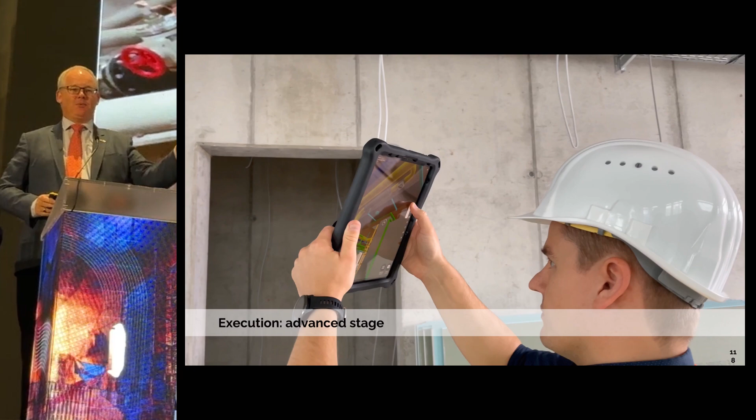You can also use it to inspect existing buildings. So you can actually check plant rooms, you can check fan systems, you can use it to inspect existing facilities. And this will become a useful facility management tool. So then you can actually check the maintenance records, etc., based on these tools. So this is going to be a tool that we're going to see more and more frequently. This idea of bringing the model to the construction project and not the other way around.

So that brings me to my current position at FTI. So you've seen my 20-year journey. I recently joined FTI. FTI is an American company, and we have over 8,000 staff. I work in the Singapore office, but I have a great opportunity with FTI. I live in Kuala Lumpur, but I spend 2 or 3 days in Singapore, and I spend my time traveling around. So I'm currently working on a few projects in Malaysia and a few projects in Singapore.

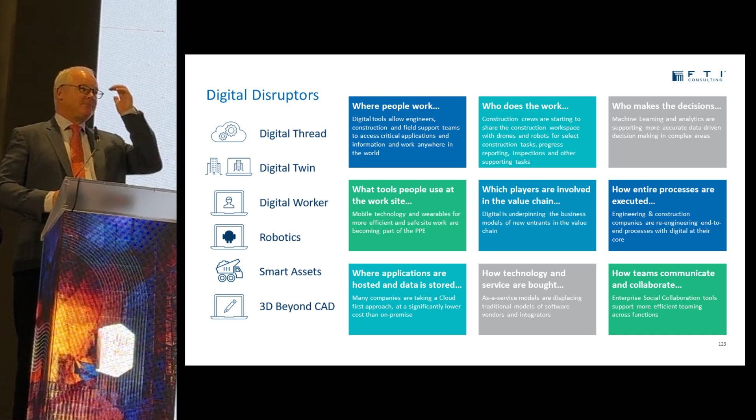We are an expert consultancy business where we provide advice. We have locations all around the world, which is probably not so relevant to Sarawak, but it's important to know the scale of the business. But what we provide is advice around digital disruption. And what I mean by digital disruption is everything from BIM, augmented reality, software, hardware, etc. So a lot of questions can be answered, a lot of advice can be provided. But I'm going to leave you with just one example of how we can help you out.

I've shown you a large number of different technologies, a large number of solutions. The problem is identifying which one. Okay? So being able to figure out which technology is going to solve a problem, which technology is the right one, that's where I can help you out. So I can give you advice about what one's going to work, what one's not going to work, what process is going to work, what process is not going to work.

But I want you to remember the same thing at the end of this presentation. What is the problem? You need to define the problem first. Don't go away thinking, oh, Ronan's got this nailed, we're going to buy this technology and then we're going to solve problems. Start with a problem. Is it concrete construction? Is it openings in concrete walls? Is it ductwork installations? Is it surveying? What are the problems you're trying to fix?

Then come up with a plan of attack. What are we actually going to do? How are we going to do it? What solutions are we going to need? And then you deploy it. So do a pilot study, make sure it works. And then the hard work really begins: training everybody how to use these systems. So again, apa masalahnya? What's the problem?